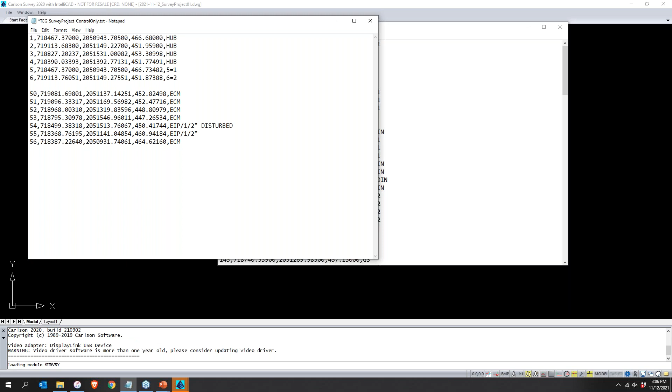And here's a good example. I have my point file broken down into 2 text files. You can see here, I've got it called just control only. You can see I have very nice and neat point numbers. That's not usually the case. And these are for my traverse shots. And then I have my corners nicely numbered, very convenient, for my property corners. As it turns out, we found all of them in the field, so it's going to work out nice.

And then I have a second point file here, which is location and topo. And so I'm going to bring this in 2 parts. I'm going to bring this one in first, and then I'm going to bring this one. Is there any reason legitimately that you would break it into 2? No, it's just going to give me a chance to demonstrate some different things.

So if you have any questions, I've told Kim to interrupt me. If you have any questions, whether there's a particular reason I do it a certain way, feel free to ask those as well. So we're going to start off bringing in this point file, and then we'll bring in this one.

So setting up my data files, I'm going to create a new CRD file. So this is my point database. I will import points from a text file and click next. All right, so when I go through this wizard, it just asks me in one screen what I want to do next, and it takes me right to that next command. So I'm going to select that text file. And here, just because of the way my folders are organized, it comes up to the correct folder. I can see a preview of the file I want to import.

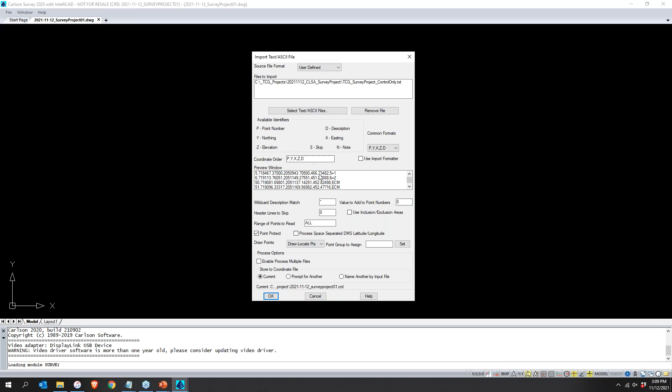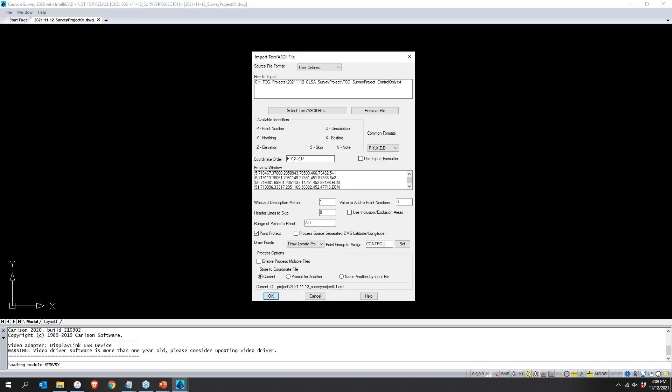I can see that preview here again. I can set up the different fields that I have in that point file. I am going to draw the points in the drawing using the draw locate points command next. And then I'm going to assign a point group. I'm going to call this control, just as a generic name for this set of points that will come back later and help me. And then I will pick OK.

All right, so the wizard tells me this has been done. I've told it I want to go to draw locate points next. Takes me here. So draw locate points is the generic command to draw points in your drawing. In this case, I have the points in the CRD file, so it's just drawing them from that file. I've got an option here to set the symbol, so I'll just leave it as the open circle. I can set a layer name for these points, and I do want to do this. And I think that's the only change that I want to make here. And I'm going to draw all the points.

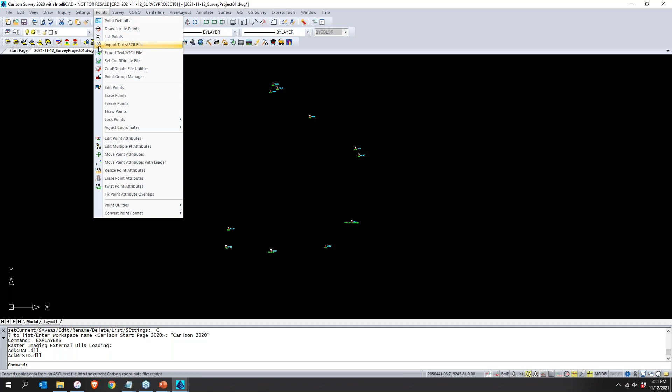So now we're ready to just import that next set of points. And so again, this kind of introduces an error that I want to show you how to get around. So for the second list of points, I'll go under the points menu and import text and ASCII. So in some cases, this is going to look like I'm doing the same thing, but there's kind of one trick at the end where I'm going to end up with something I don't want. Select the text or ASCII file, and I'll pick my topo text file. I can see my preview here again.

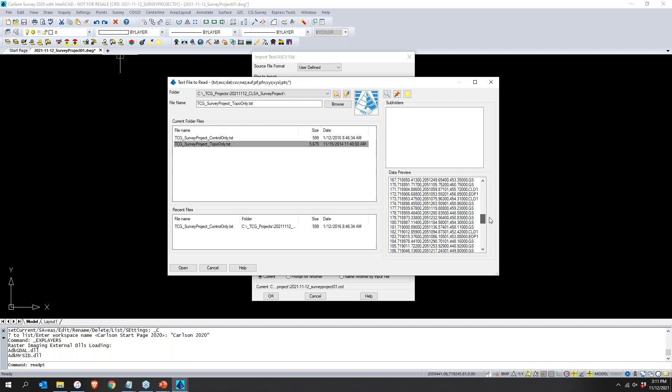All right. Importantly, this is a second set of points, and I'm going to give that a different point group, and then kind of watch what doesn't happen here. So it's going to draw locate points. If you remember when I went through the wizard, when I picked OK here, it brought up that draw locate points dialog box, and it asked me for the symbol, it asked me for the layer. When you import points not through the wizard, it didn't give me any options. So this is exactly what I did not want, is for all my points to be on the same layer, which is what I've got.

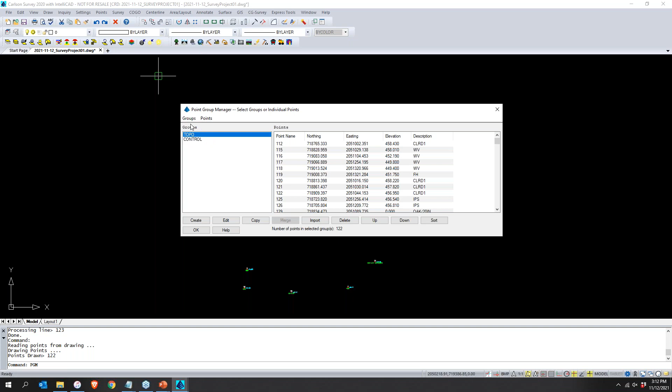So this is where we can kind of see the beauty and the importance of having points separated out onto point groups. There's a lot of different reasons you may want to use point groups. This is one. It just lets you quickly identify points that you brought in at different times maybe. So what I can do here, since I have this separated out, I can just redraw my point group topo onto that new layer. So I'm going to go back to points, draw locate points.

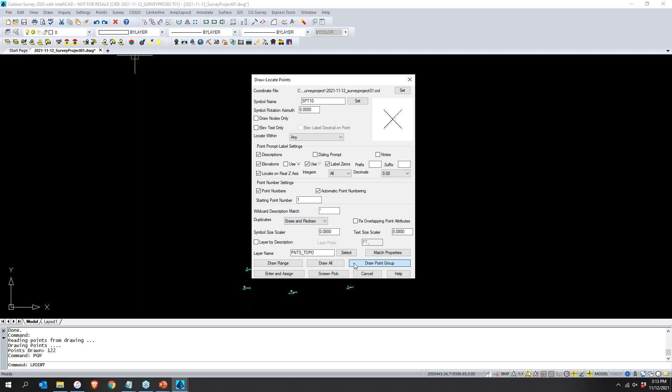And now it's giving me the chance to change the point symbol. So I'm going to change this set of points to my X. Right here, I can change the layer, and we'll just put this on topo. And now I don't want to draw all, because if it draws every point on this layer, I've got the same problem, basically. So I'm going to use the draw point group button, and I want to redraw the topo point group points on that new layer. Couldn't even really see it here. But if we look in our list of layers, you can see I have those on different layers now.

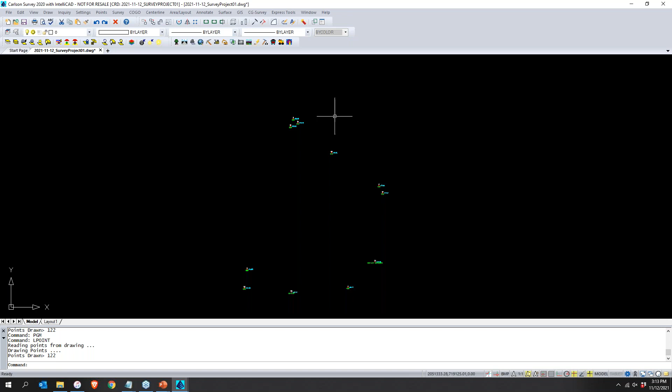All right, so let's take a little closer look at my points. Let me find a file here. Okay, so here's my deed. So I've got a point of beginning with my known northing and easting, and then I have all of my deed calls. So what I want to do next is show you what's probably one of my favorite commands in the software, the enter deed description. It's very forgiving. This is a very simple example, but once we go through this, I'll explain why I like it so much.

I'm not going to snap to anything. Yeah, I don't want that. Okay, so I've turned my object snap off. I'm just going to sketch in my boundary. So this would be my point of beginning basically, right? So 50 and 51, 52, 53, these are my corners. So that's generally my boundary.

So when I enter this plat, I'm actually just going to enter all those calls starting at my POB and going clockwise this direction. But I'm not going to start here. I'm actually just going to pick a point in space and sketch it over here. Why wouldn't I start at the POB? There's no good logical reason not to, except that I want to show you how to use the translate command. And I can only do that if it's not in the right place. So we're going to sketch it over here.

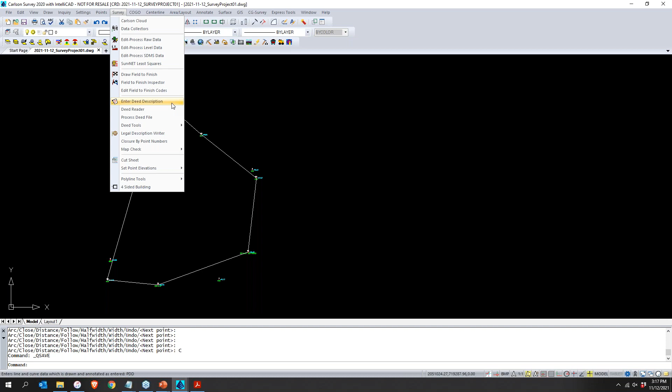So this is a simple example, like I said. You will really appreciate this if you have ever had to key in a boundary line down a line table, and you have 30 rows of a line table and your eyes cross and you make mistakes and you enter the same one twice or you skip a line. Picture yourself doing that and you will appreciate this command even more. All right, so we're going to enter deed description.

This is the layer that my lines and curves are going to go on. Of course, I've just got lines. I've got a deed name, so I'm just going to leave it at lot 1 for our purposes here. It will draw the line work and create the polyline. I have points turned off. I tend to be protective of my points, so I would rather enter my polylines, make sure the polylines are correct before I set points on them, just because I know I'm apt to make a mistake.

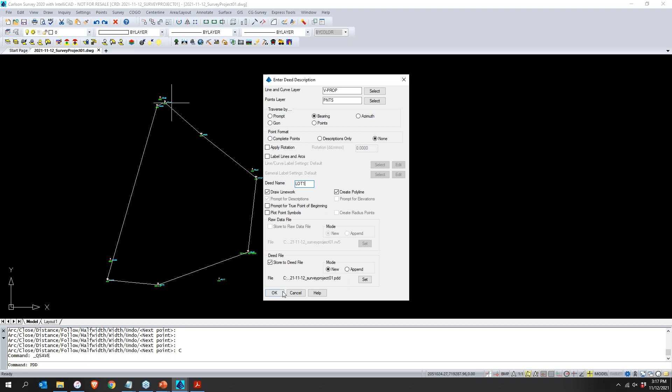And then this is the data file, so it's going to store these boundary calls into a deed file called a PDD. All right, so pick the point or point number. Where am I starting? I'm going to start here. And then the format that Carlson looks for is shown here. So it's QDD period

MMSS. So a fun fact is that Q, even though it stands for quadrant, there's 9 different options because we do have some old deeds. 1 through 4 are going to be your standard quadrants: northeast, southeast, southwest, northwest. You could put a 5 in there as a quadrant, and it's going to be an azimuth. So you could enter it as an azimuth. 6 and 7. Yep. Sorry.

Are these commands available if you run Carlson with Civil 3D as well? They are, and I should have explained that, and I apologize for that. I'm running on top of IntelliCAD. This exact same package that I'm running can also be installed on top of any full AutoCAD. So that would include Civil 3D. And it just basically strips out the IntelliCAD piece, and so Carlson would run on top of that. But yes, very good question. All good?

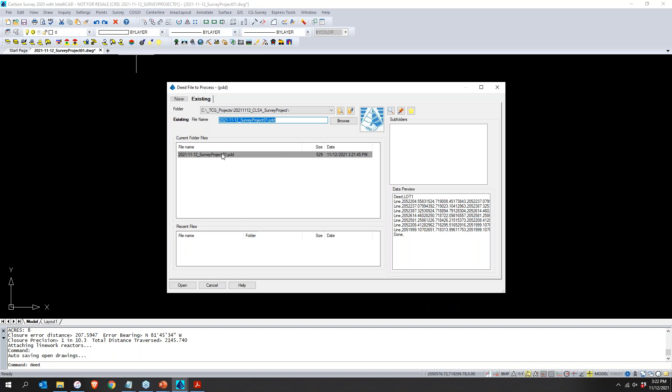and I can process that deed file. So I'm going to process the deed file. There it is. I'm going to open that. There's my lot, and let's edit. And this is what I love, okay? So in the top, I get everything in a table that looks like an Excel file, and all surveyors and engineers, I think, love Excel files. And then I see the graphic below.

If I click on any row up here, it highlights it in the graphic, and I can go fix the one that I need to fix. So you can see here where I accidentally hit that. And I can just put my degrees, minutes, and seconds in, and it fixes it. Now, maybe you completely left out a line. Well, you can just hit an add button and it adds a new one at the bottom. Let's say 200 feet, and I'm just going to put in 45 degrees.

So there's that line. You put it in at the right angle and the distance, and then you hit this button here to move it up the list, and it's kind of goofy looking. But you can see you can move it up to where it belongs. Okay, so I'll take it all the way back down. Maybe you put one in twice, you can just remove it. But this is where I wanted to be. I think that's good. I think that completes my boundary. So I'm going to pick OK.

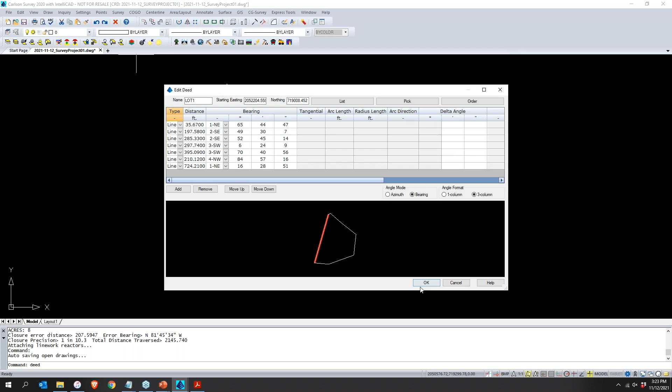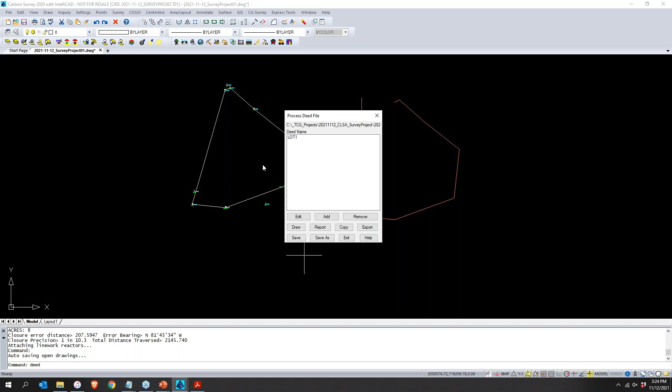So let's double check it. That's not what I meant to do. Notice again here, I can change my starting northing and easting if I want, but I want to use the translate command, so I can show you that in a minute. Let's report that. All right, so I've got a little better closure. I can print this, I can print it to the screen, I can save it to a file. This is Carlson's kind of an enhanced notepad. It still looks like this in the drawing, so I need to redraw this.

Label lines and arcs. What this command does is a command called auto annotate, and it lets me set up one labeling format for my lines and another one for my arcs. So you can see that's the way it's set up currently. I'll just accept that for now. We'll come back to it later. I'll save that change and exit. So there's my boundary. I'm going to erase this little sketch that I put in and we'll move on.

So I'm ready now. This is where I'm kind of going to skip a step here in a minute. I'm just going to kind of swag this in, and we are going to add points to this polyline at the corners, and these will be our deed points. And then I'm going to move my deed boundary and the points over here to their actual POB coordinates. So I'll use a command under the COGO menu to create points from entities. This is a pretty slick little command. Actually, hang on, let me show you one thing I want to do.

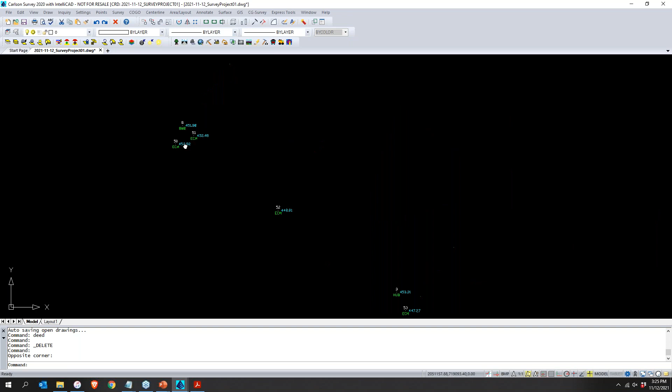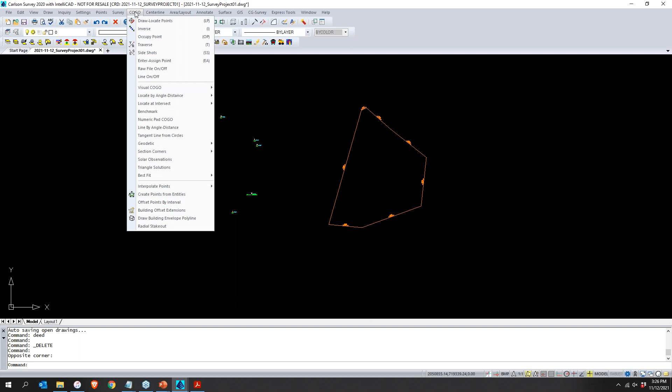So remember that my property corners over here, I have these nicely numbered, 50, 51, 52, all the way around, I think, to 56. So when I set this up, if we have time to do a deed correlation routine, I'm going to try to get my point numbers here to correspond with the field shot points. So when I create points from entities, these are going to be my deed points. So I'm just going to pick another symbol. We will call these points deed. And then my starting point number, remember this was 50, so I want this point number to be 1050.

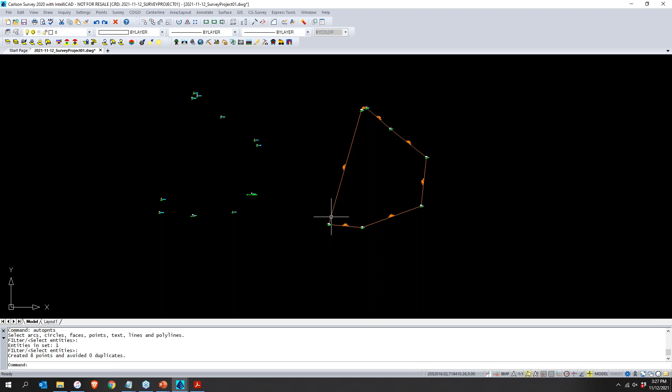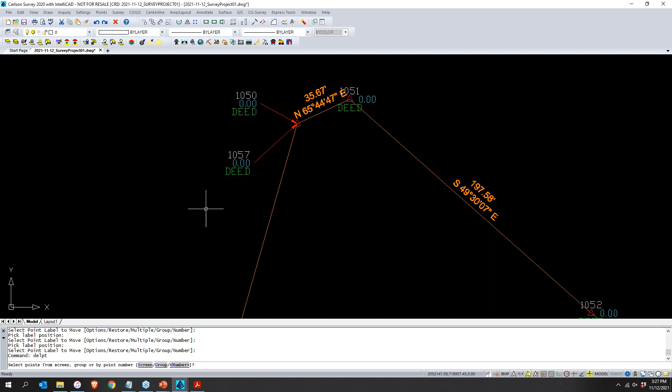And then I've got some options here on how to set the description. I'm going to keep this simple and just make my point descriptions for these points deed. Entities to process, I've only got a polyline here, so I will pick OK, select here. And then let's look around here. So you can see that where we didn't close exactly, we do have a duplicate point, kind of. So under points, I'll move point attributes with a leader. And I can pull this guy out here and this guy out here. For what I'm doing, I really don't need point 1057, so I will just go in and erase that point from both the drawing and the CRD file.

All right. So I have point 1050, and where should 1050 be located? It should be located at those coordinates. And just to be clear, point 50 is just field located, and it's not exactly at that coordinate either. So let's just list point 50. So there are the coordinates for 50. So when we move this over, it's going to be close, but not exactly. And again, that's where the deed correlation command comes in. It takes a few minutes, so we'll save that to the end if we have time.

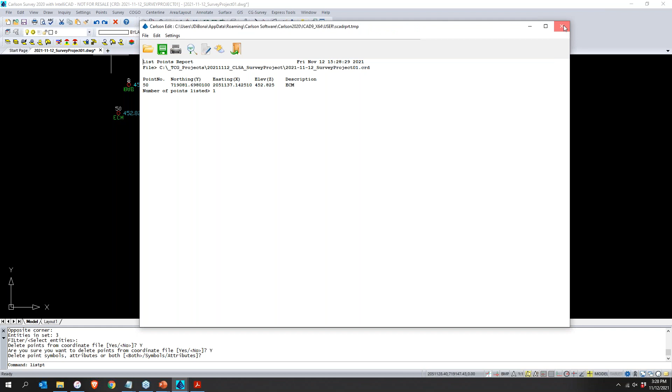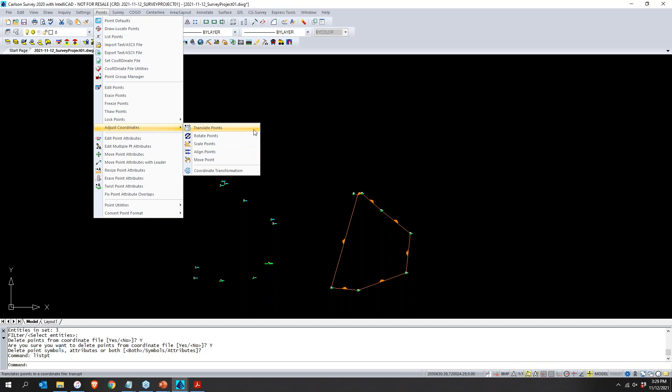But for right now, all I'm going to do is use a translate command to move the points plus the polyline over here to that POB coordinate. So under the points command, I'm going to adjust coordinates. Notice that you have several different ones here. So we've got translate, we've got rotate. The align command is that combination translate and rotate. Again, you can kind of tell this was done by people who've used it.

When I go into translate, or any one of those commands, this is the best button ever: undo last translate. It's so easy to make a mistake, and you're like, oh gosh, how many points moved? What did I do? You may be half an hour down the road and making other edits before you realize that something went wrong. You can always come back in here and undo the last translation. So I love that. What am I going to translate? My original point is going to be my point 1050.

As soon as I hit tab, you can see that it pulls the coordinates. My destination point is going to be my POB location, so I'll just enter those coordinates. 19081, okay.

This gives you the ability to translate using any method you need. If you just know your delta north and delta east, you can do it. I'm not changing my elevations, I've got this checkbox unchecked for process elevations. What range of points do I want to move? I don't exactly remember my point numbers, so I'm just going to give it a broad range.

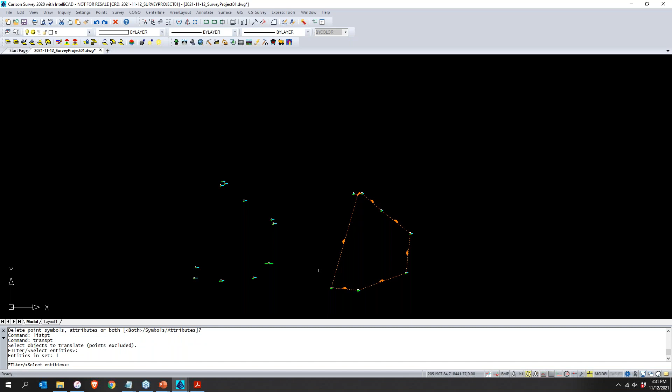When I move these points, I would also like to translate the boundary that goes with it. Now I've got object linking turned on, so when I click OK, that command already knows what points, so now it's just prompting me for the objects to be translated. It kind of doesn't make a lot of sense, but it already knows what points because I gave it that point range. When I select my polyline, it translates the points, translates the polyline, and the labels go with it, which is exactly how it should be.

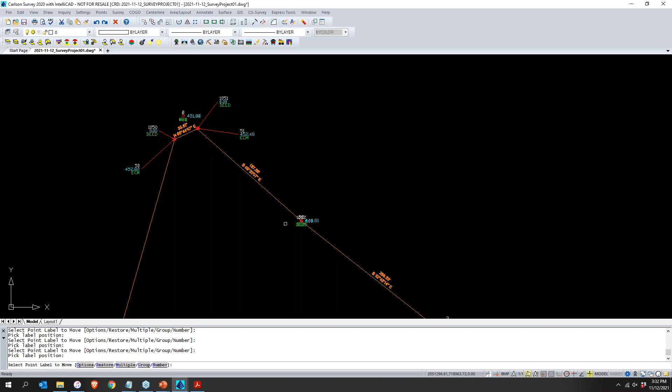So these are going to be close, there's going to be some difference between them. The deed correlation is how you can try to best fit that deed in there. But I've kind of got it where I want. I think I'm at a point where I'm going to do a legal description, and then I think we're ready to put a sheet together and start doing some labeling.

Let me get a quick save here, so we can do a legal description. Let me show you how this works. I'm going to do it from my boundary polyline. I will click here.

I think this is going to get a bad result, but let's see what it looks like. I'm going to click OK. So I had my deed points in there, I probably didn't want those.

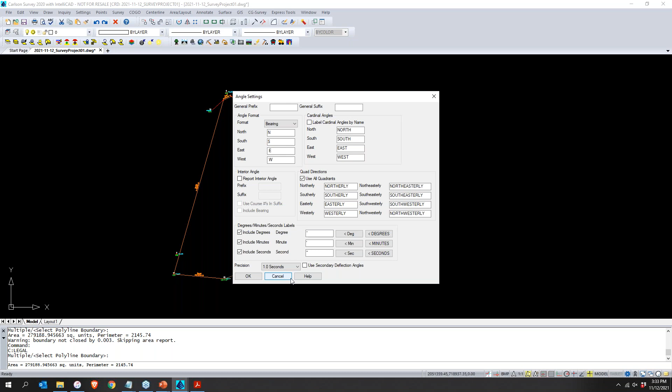This legal description writer has a ton of controls in it. I'm going to go ahead and pick that boundary again. But notice under settings, we just took the defaults. You can click through here, you can save all these settings with different details in it. So if you have to set up to record in different counties or different locales, you can have a standard settings file for each different location, and it'll just update this. So you can get very granular in how you want this worded.

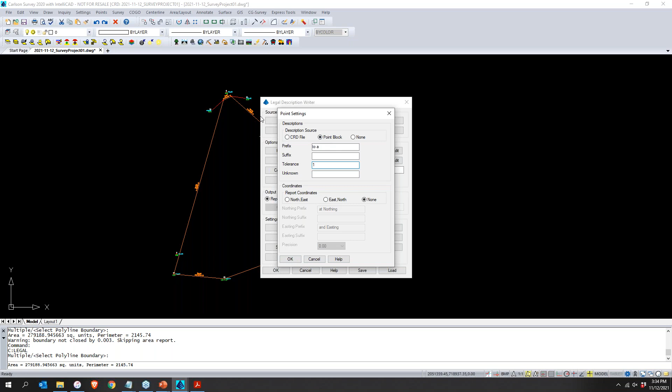If we look under the point button, you can see I have a tolerance of 0.1. I told you I kind of manipulated the data a little bit to make some errors bigger, so the error here is horrible. I need to set this to a foot - proper surveying, this is not. I'm going to set this to 1 foot, because it's looking for that corner, that point close to a vertex, so that it knows what corner it's going to.

As soon as I increase that tolerance, it was able to find that point in there. You can see how the capitalization works, you're not going to get A or N in here. It doesn't understand anything, but it's capitalizing title case right now.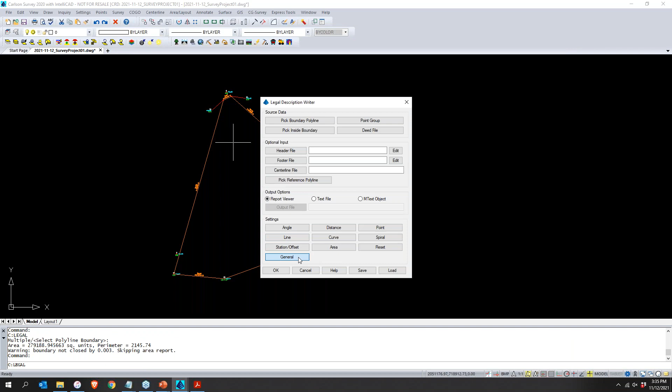Let me go in one more time and look under the general button. You can see some of the verbiage you can change, like the new line trigger word. Here's my case, it's proper case, sorry. All right, so I'm going to cancel here.

All right, so what do we have? Let me turn everything back on.

Let's take a quick look at this layer inspector. If you're an AutoCAD user, this is like a layer walk. I think it's an Express tool, or maybe they embedded it now. But this is layer inspector.

It lets me go through my list of layers, and as I click on any layer, it isolates the entities on that layer. So there's my property. If I hold control, I can see more than one, so you can see what's in this drawing. Okay, so not a lot.

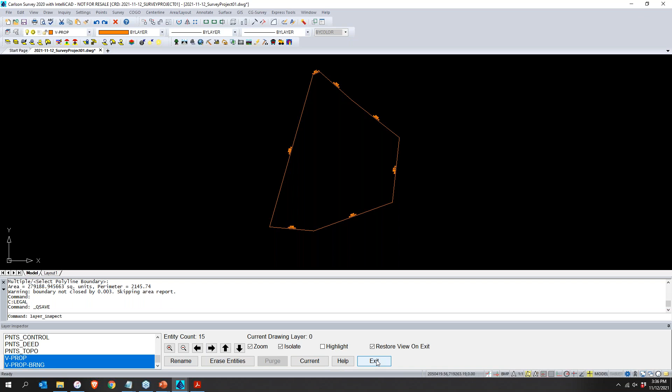We have points, but if I wanted to build a surface, I don't have any break lines drawn. I don't have any of my site details. None of my line work has been done, none of the polylines have been drawn. So I am going to redraw everything. I'm going to freeze my boundary - that's the only thing I've really manually put in here.

And then I'm just going to erase all this - I know that doesn't sound right, but I'm going to erase those points. You can see the list of layers that I have. I'm going to purge all my layers. So the only thing that's in here now is that boundary.

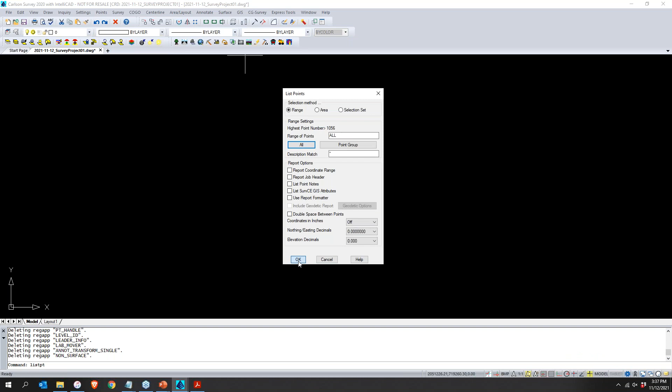And then I'm going to switch over and redraw all of that information. So all I have right now are points in my CRD file. And I want to use Carlson's draw field to finish feature, and I'm going to have it redraw all those points. Let's just take a quick look here.

So real quickly, Carlson's field to finish - I'm assuming most of you have some experience in either Land Desktop or Civil 3D. Carlson's field to finish is going to be like a combination of description keys and automatic line work in the survey portion. So based on a point's description, we can tell it to draw different entities.

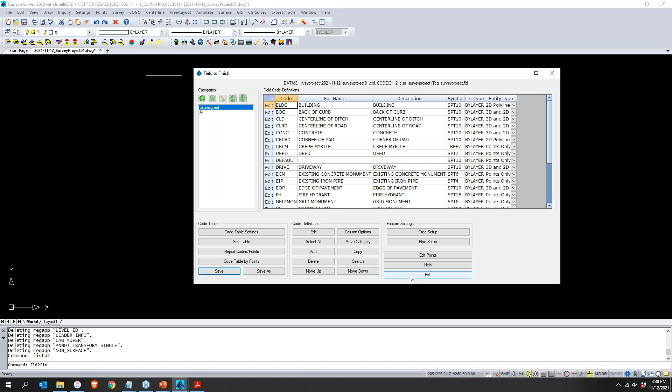So you can see the entity type column I have here. Some of it is just a symbol, some will be 2D polylines, some will be 3D polylines, some will be 2D and 3D. So I'm going to reprocess all these points and have it draw my line work for me - 2D line work that will be shown on my drawings, and 3D polylines for break lines for my surface.

So everything ended up, well, mostly with the same color, but you can see this is a variation on a National CAD standard list of layers. If we go back and look at that layer inspector again.

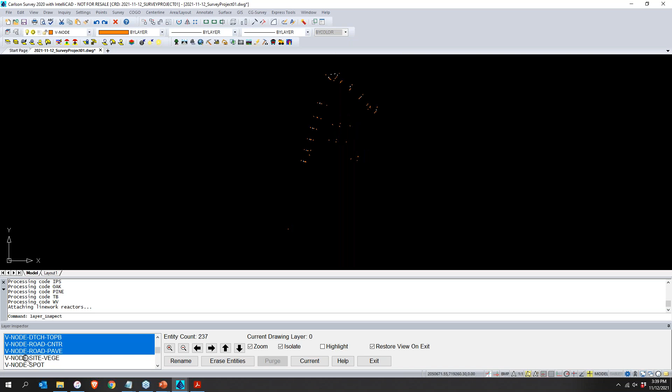I've got buildings that were drawn, I have a ditch center line, I have a ton of layers. All my points are sorted out onto layers that start with V node, and I'm just holding control as I'm adding those so you can see they're all sorted out for me.

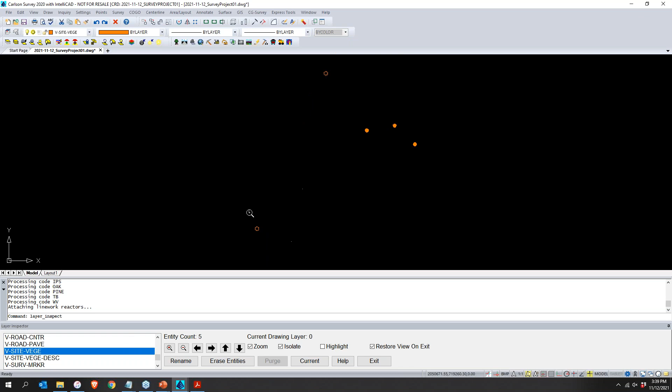My property line is still there from where I did it earlier. I have a road center line and an edge of pavement, the one thing on a different color. I have tree symbols, I have property corner symbols. I have a bunch of 3D polylines for my surface, and then the lone fire hydrant.

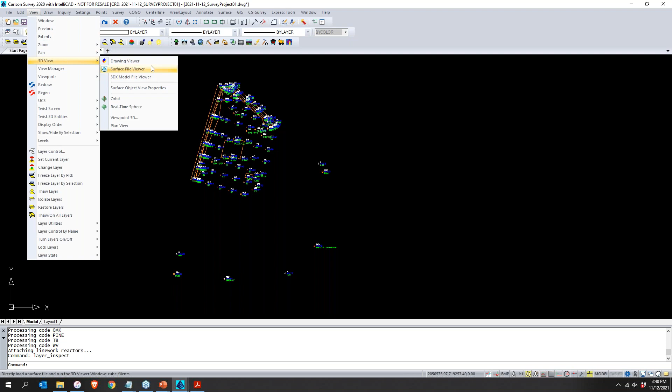We can also look at this in 3D. Let me just do that - I hit the wrong thing. Drawing viewer, there we go. Oh, I bet this is going to - yeah, I keep getting that error. I've got some kind of a graphic card thing, just have to do it twice. There we go.

So here's my 3D viewer. I can tip this up. You can see my elevation range. I've got this exaggerated by 5 times now, so you can see these are my break lines.

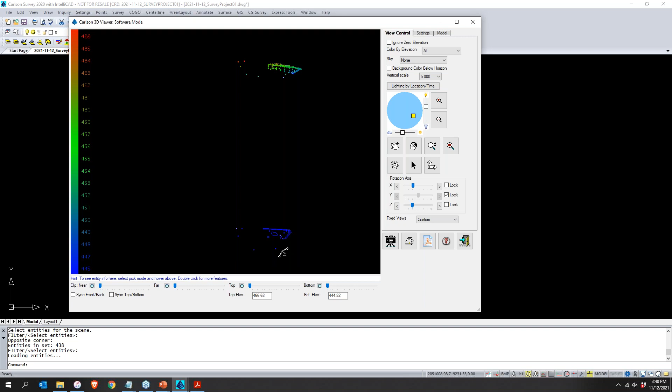Right now I'm ignoring 0 elevations, you can see here. If I uncheck that, that's my 2D 0 elevation polylines that I'll use in my drawing. So I am set up here to build a surface.

I think I've got time to do that, I'm going to try to sneak this in here. So under surface, if I do triangulate and contour, I am going to have an error here. Let me figure out the best way to explain it. I guess we'll just go through it.

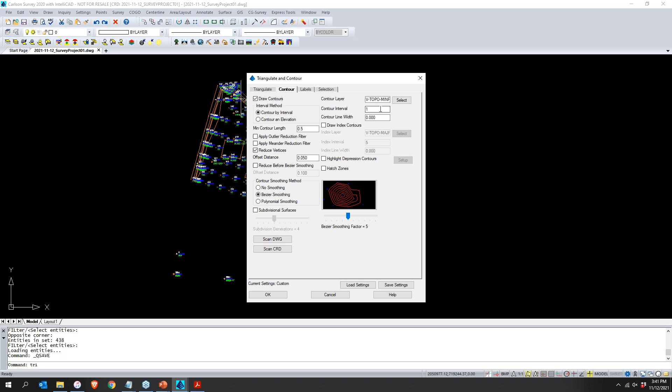So I will write my TIN file. This is my surface name - this is my EG, existing ground. I'm going to create 1 foot contours on this layer, and label my contours. It's going to filter out and only use points, 2D polylines, and 3D polylines, and I will pick OK. Put a window around everything.

And it seems like it worked okay, except for this. So I have something going on - let me explain.

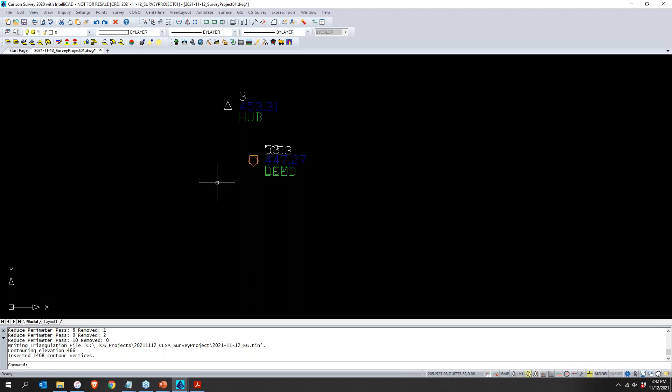It seems like it found the boundary. It knew to exclude some points, and it happens to be these are points I wanted it to exclude. Why did it exclude those?

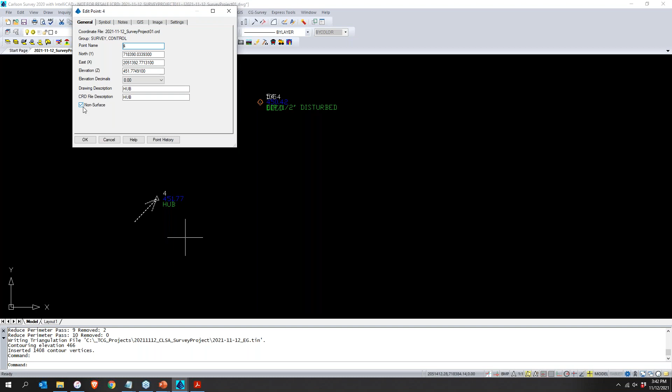Well, Carlson has a setting called non-surface points and entities. If I double click on this, you can see that my hub, based on my field to finish settings, has been tagged as a non-surface point. All of my other corners, I've got a bunch of stuff in here. Let's move this out.

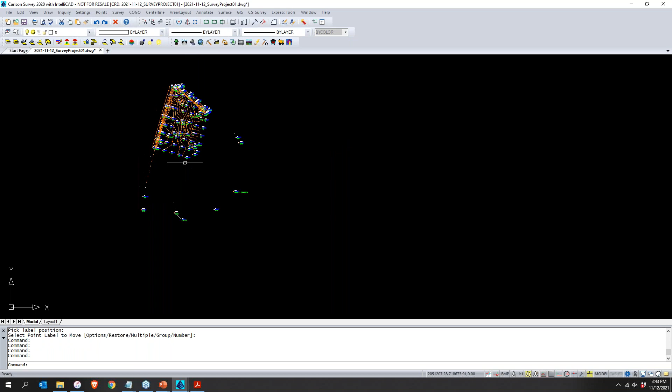Okay, if I double click on this, my EIPs, non-surface. Deed points, non-surface. So even though I selected everything here, it knew to filter these out because they were non-surface points. So what happened, Jennifer?

Is it possible to draw a surface without using field to finish?

Oh yeah, I could have done it without using that field to finish. It would have just used the points and I could have manually drawn in 3D polylines. Absolutely. Let me know if you've got any follow-ups on that.

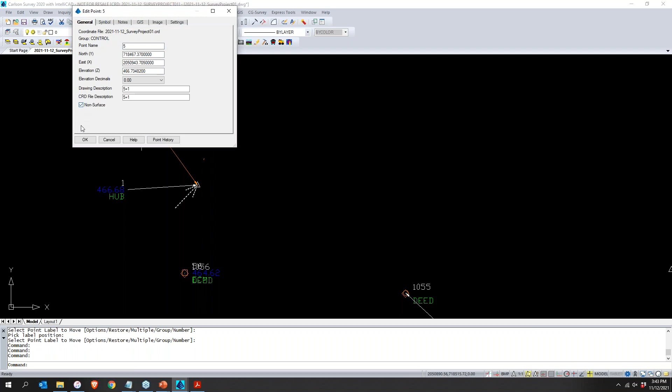So you can see here, if I double click on hub, we've already seen that anything with a hub description is already tagged as non-surface, but this is not a standard description. 5 equals 1, that's not a standard description. So field to finish doesn't know that it's supposed to tag points with that description.

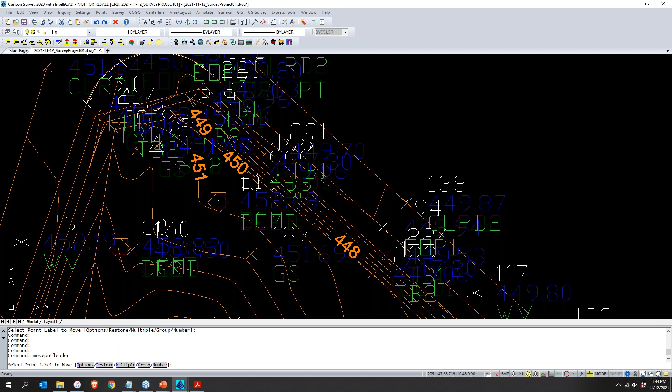I have to manually do that. Now, when I see that, I also remember that I had a point up in here somewhere that, oh boy, I gotta find it. There's another point that 6 equals 2. That should be a non-surface point as well. And so I would uncheck that.

So now I've tagged those as non-surface. If I go back to triangulate and contour, I'm going to overwrite this surface, so it's going to ask me if I want to overwrite it and erase the previous contour entities. It knows to automatically disregard anything that's non-surface, and so we get a much better result. So it knew to exclude this.

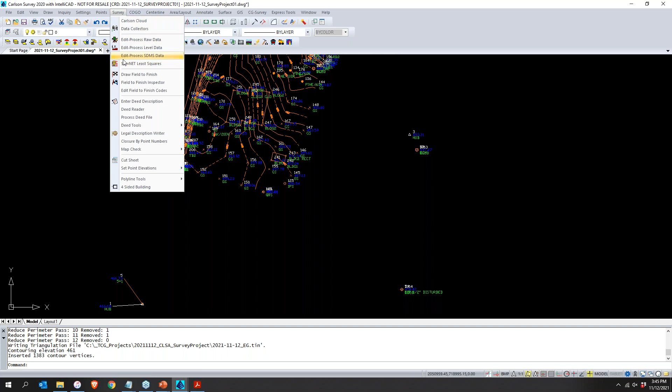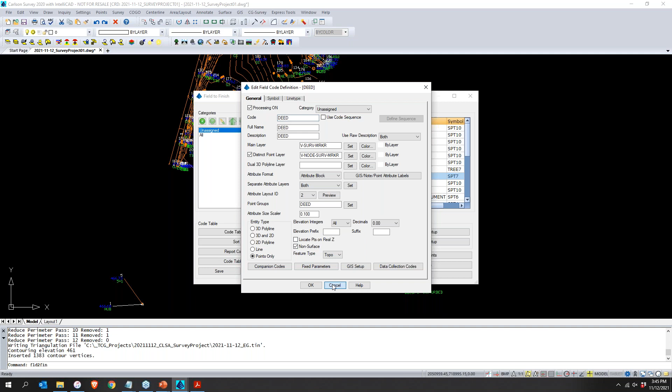Now, non-surface, that functionality is built into field to finish. If you look here, we saw that deed was a non-surface. It's just a checkbox. So any descriptions, any field codes that you would want to exclude from a surface, you can just put a checkbox there. If it's got that random description of 5 equals 1, it's not going to be non-surface, but you can set that up.

There's also a manual way for the person that asked whether you have to use field to finish for some of this. It can be done manually, pretty much everything. So if you want to manually select points that need to be excluded from any surfaces, you can just go right here and tag non-surface points.

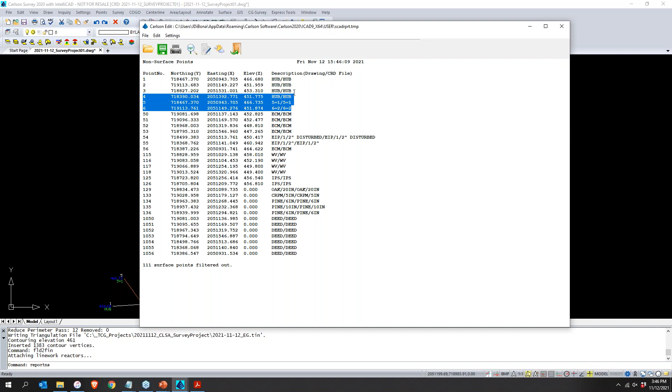If I look at my report, you're going to see here's the list of things that are being excluded. So there's my 5 equals 1 and 6 equals 2. So I like that, that's pretty smart. But I've got a surface model now. You can see the contours that were drawn. If I look at my 3D viewer now, I can actually look at the TIN file that I created.

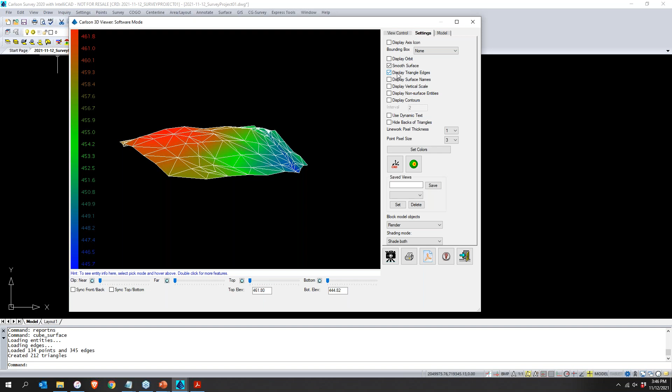So there it is. We can look at it up. And I'm not seeing my grid lines. If I go to settings, I can actually just have it display those triangle edges or not. Okay.

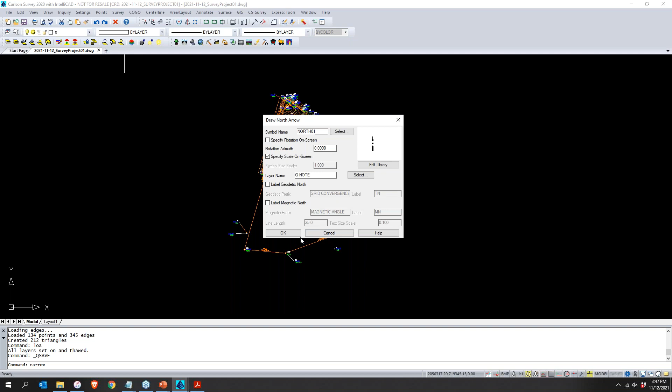Let's start labeling a little bit. I'm going to turn all my layers back on. So under annotate, I can get most of the pieces that I'm going to put on my sheet. So I can draw a north arrow. I'm just going to pop one in here so I know which way is up.

Now I'm going to use a command under Carlson's view to do a twist screen. This is another command that they've enhanced and made it easier to use. It does use the D-view twist, which I've never been a great fan of for a lot of reasons. But Carlson makes it so nice, and they've built into their twist screen and twist commands things that fix all my complaints. So I'm going to twist the screen because I want this. This is a boundary line along a highway. I want that to be horizontal on my sheet.

Select a line, polyline, or text. Click here, hit my enter key, and you can see it's been rotated. My crosshairs have been adjusted.

So what's the problem? I'm going to show you, we have these points in here that are no longer upright. And so this is one of the commands that Carlson's built in that makes me like this. It's not going to work well for anything where I've got those automatic leaders pulled out, so it won't fix that. But if I look down through here, that word twist means a certain thing to Carlson. So twist point attributes: when I hit that command, the attributes are going to be the symbol, the point number, the elevation, the description labels.

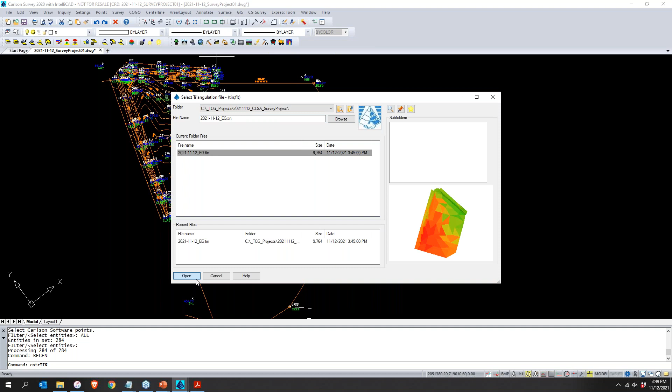My contour labels are still upside down. I may need to fix that. If I want to fix that, I can just go back and recontour everything. The surface is built. I don't have to redo any of that. And you can see that's all been fixed.

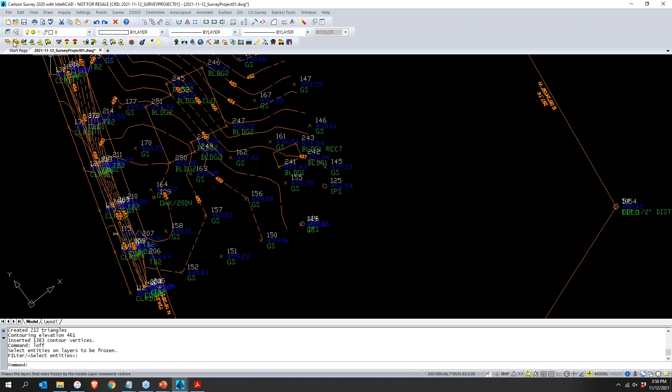All right, let's take a look at some more labels. So again, my points did not do well. They did not come through that very well. I am going to freeze my contours. Actually, instead, let's just isolate my boundary with the labels. So the labels are upside down. So let's just take another look.

Remember, we did that as part of our draw deed file earlier, but we're going to go back now to auto annotate and update some of those settings. So auto annotate, we talked about this earlier. This is our current setting. If I want to maybe just relabel everything to where I've got the angle above and the distance below, I'm going to switch the distance to below now, and I will put it one row from the line I'm labeling.

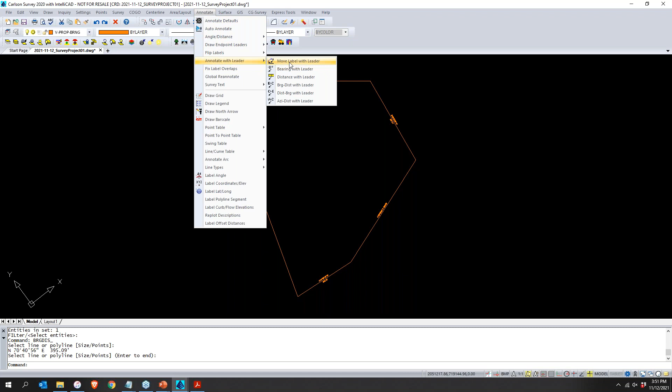I can pick OK, select here, and you can see that's a polyline. I clicked on the polyline and it redid everything in one fell swoop. Maybe I don't like that. Maybe I just want to label one leg of it a different way. And I can also do that under angle distance. I've got all these different formats. Pick here. Once it's labeled, I've also got the ability to just move that label out with a leader. Something like that. So this is very flexible.

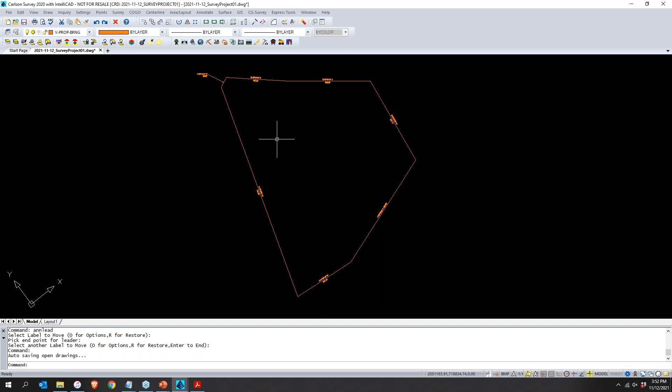They've got a ton of neat little commands in here where you can label an outer boundary differently with its component distances for subdivision lots, things like that. I realize I'm running out of time, so I've got my buildings here. Let's actually do our...

Did you have a question, Kim? Yeah, sorry. Yep, no problem. I heard you. Is the surface created with Carlson compatible with Civil 3D, or would there be additional steps for engineers to be able to use it?

Land XML is the wonderful tool that lets you create generic data files, basically for any program from any program. So Civil 3D will import and export Land XML files. Carlson does have some import routines, but I would encourage everybody to get used to Land XML. It's been around since Land Desktop. So I would always try to import and export through Land XML because it's going to be an exact replica of whatever it is you created. So I would use that. Happy to follow up with anybody on that.

But Land XML is in every Carlson program. It was in Land Desktop, it's in Civil 3D. It takes the information beyond the drawing. DWG is completely compatible from Carlson. So Carlson doesn't necessarily have all the dynamic abilities of Civil 3D, but what Carlson does do is every entity is a generic CAD entity.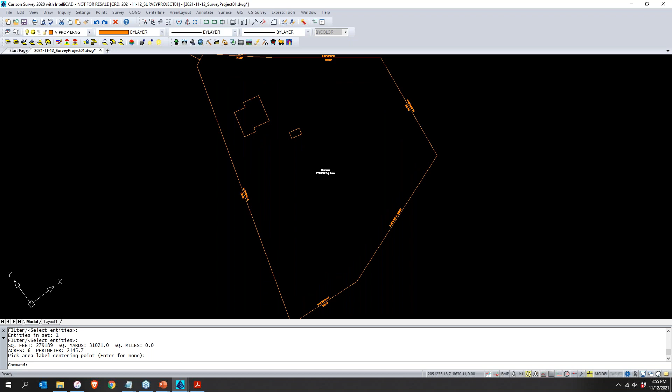Let me just do a quick area label. So I've got area by lines and arcs. So I can customize this under area defaults. You can see if I want to add my lot description, I can put that in here. I can double click and I can put a prefix. I can do all this customization, acres. If I don't want it spelled out, I can do AC. I can change my precision, things like that.

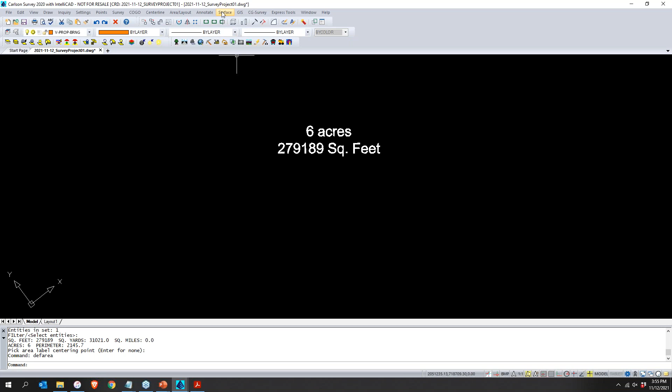And relabel. Just something like that. So I've got buildings here. This is a special little kind of a sub menu. This is classic Carlson, so it has its own set of defaults. It's just these 3 neat little commands that are very handy.

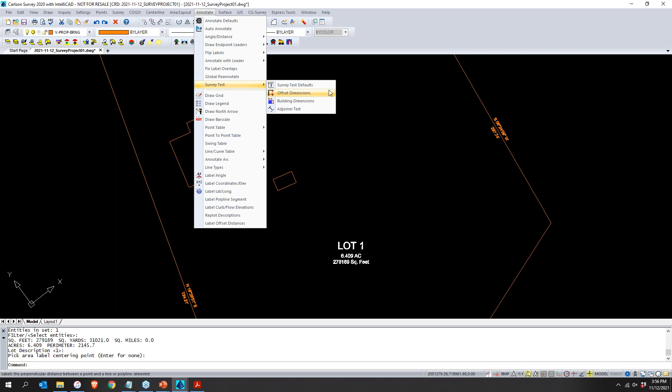You know, what I try to focus on a lot of times on this stuff, I try to show you things that will save picks and clicks. And this is definitely one of those. So survey text has 3 different little commands in there. So the building dimensions lets me do this very quickly and easily. Now it doesn't have a lot of formatting options. I can't just easily pull it out with a leader, but it gets you that very quickly.

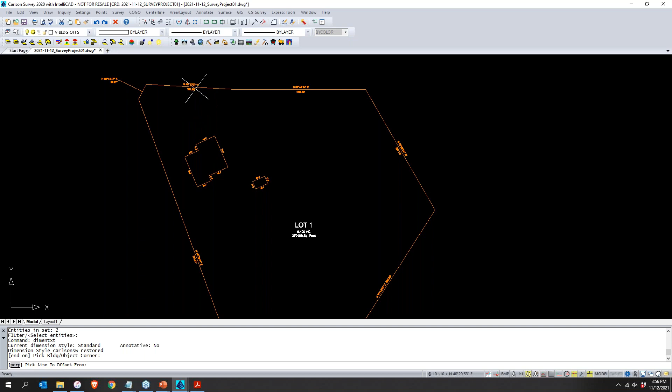Another survey text is like offset dimensions. So the picks and clicks this saves, it immediately puts me into an endpoint object snap. And then it puts me in a perpendicular object snap. And it creates that. I can format that with 2 arrows or what have you. Endpoint, perpendicular. So just very easy little things like that.

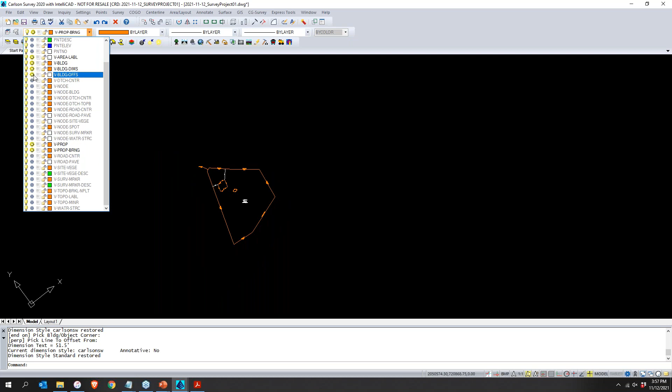Almost there. All right, let me turn my layers back on. Actually, let's turn everything back on. I don't know that I want everything. Under settings, Carlson has a very generic, very rough little title block that we can put in. Paper space or model space. So there's my border. It does have attributes built in here. So if I put it in the wrong place. So I can enter that data.

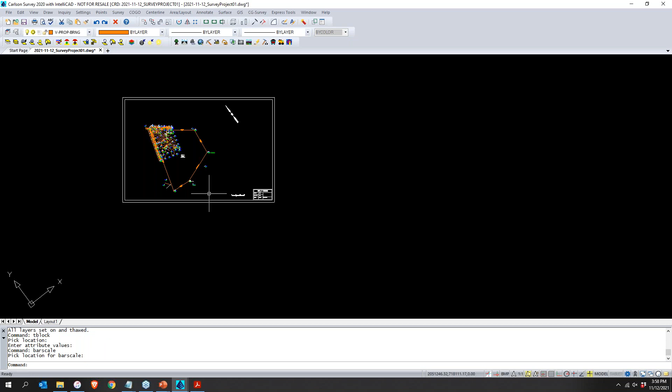These can be customized. You can put it in there to make it just that easy to enter your borders, your title block. We have a bar scale, 3 different styles. I can put that here. And then kind of my little finale, I'm going to show you a legend. So legends is one of those things that's just a pain in the neck. It just seems to take time, and I think it just kind of annoys everybody.

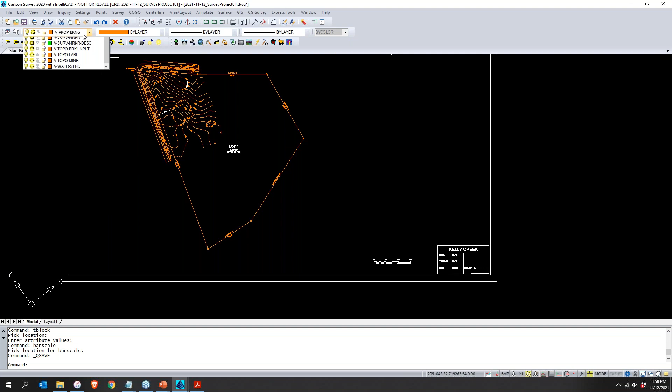I'm going to turn off my point layers. Let's see what else. Let me turn off my 3D polylines. And then everything else. Let me show you this neat little thing, how Carlson does a legend. So like everything, it creates an external file, but this is something you can save and go back to. I want to add legend items from my drawing. So I will just put a window around all this.

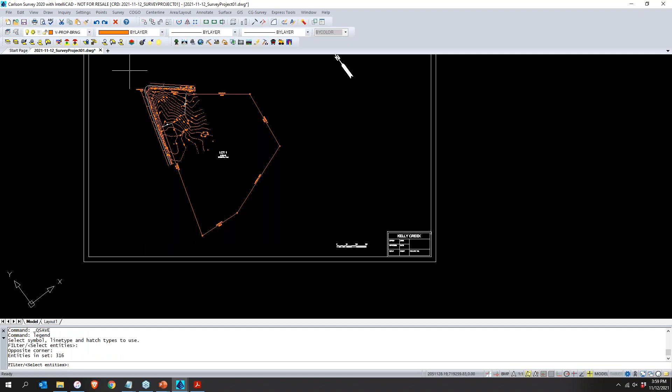And here we go. So I'm going to sort these. So you can see it pulls out unique line types and layers. It's taken the layers, or the description is the layer. I'm going to remove the continuous line types. I've got my contours. So for instance, I can double click on this and say, this is an existing contour.

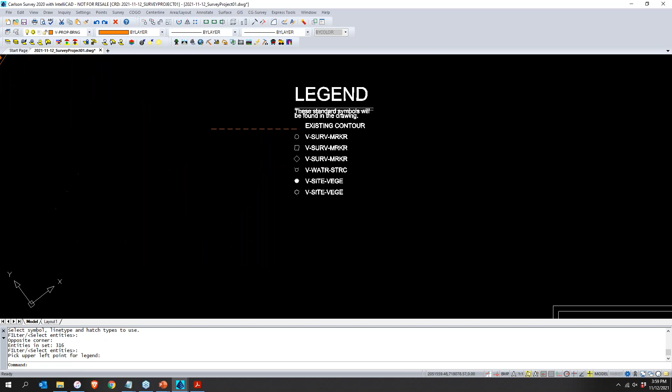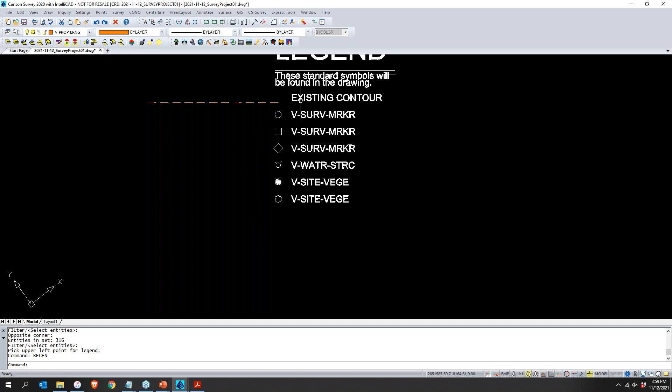Let me just save this and then let's draw it. And then I'll show you how to take it one extra step to save a few more picks and clicks. But just very easily, you've got that. Now, rather than using these symbols and having to go in and modify that manually, let me show you what else you can do. We had field to finish. In my field to finish file, let me show you.

In my field to finish file, I have things like this, where that was the raw description, but I had a full description here. So Carlson's legend command will let me take advantage of having that built into field to finish. And I've got this button here to set the description in my legend by the field to finish description. And I'm just going to go and select my FLD file. It set 6 descriptions for me.

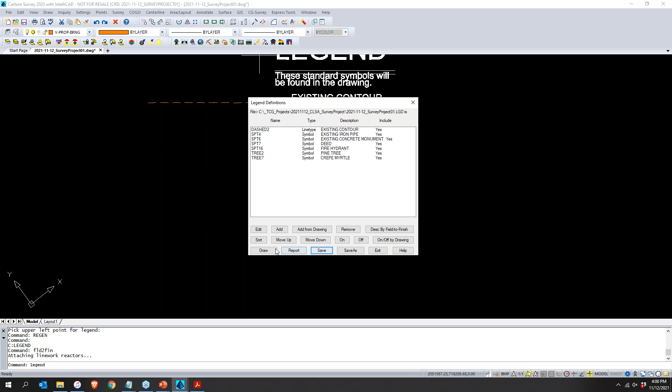Let's save it, and then I will draw it once again. And that's it. A lot of formatting stuff. That can all be fixed.

I did it. It's 1 minute after. I almost did it. I think that's all I had.